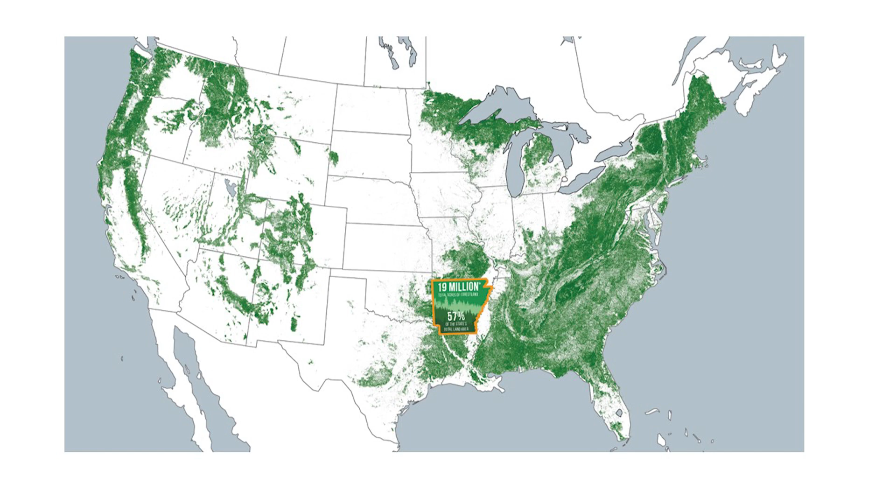This is about connecting the responsibilities and obligations of a public land-grant university, and in that, a School of Architecture and Design, to the interests of the state, its citizens, its natural resources. And it's best framed by this question: what does it mean to be a public university and a School of Architecture and Design in a state that is 60% forest? We're sitting here in the middle, I would argue, of the greatest natural resource in the United States.

Arkansas is 57% forests, 19 million acres. This is an agricultural state, to be sure, but the predominant dimension of that agriculture is its trees. And yet, for all of that, we are a state that is being overgrown. We are a state that is growing 2 trees for every tree that is capable of being harvested. And this is a surplus biomass of about 15 million tons per year.

Surplus is both challenge and opportunity, as economists would say, and the challenge for us is that it is an environmental challenge in terms of a density of forest that will lead to greater wildfires, greater insect infestation, greater difficulties with our groundwater. And at the same time, there is surplus opportunity in this if we can in fact devise new materials or new products for new markets, or even new uses for old products, such as dimension lumber.

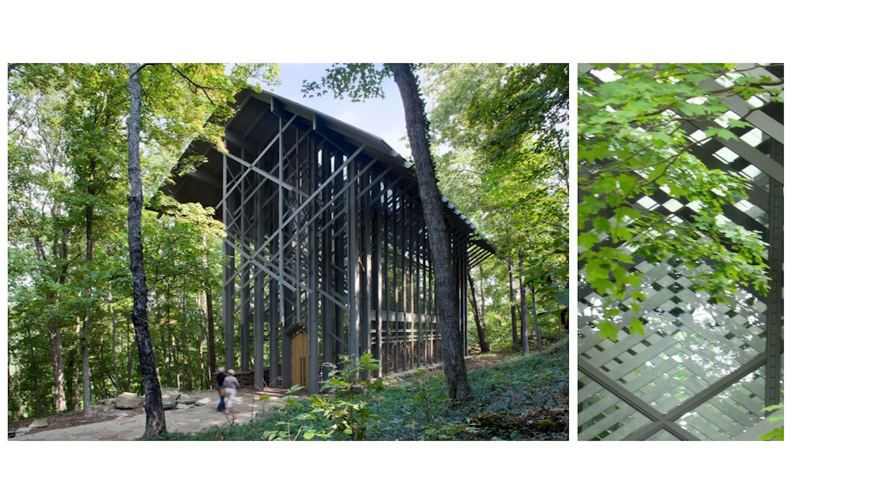engineering, and construction. And it's also so that our namesake Fay Jones demonstrated through multiple buildings the virtuosity of working with dimension lumber, seeing in that simple, banal material greater possibilities of elegance, of efficiency, and altogether beauty. And this then attaches to our work as a school to disrupt, I would say, for the greater futures of our students, for architecture, engineering, construction, for the citizens of the state, to disrupt community design, health and wellness design, housing design, timber and wood design, preservation design, resiliency design.

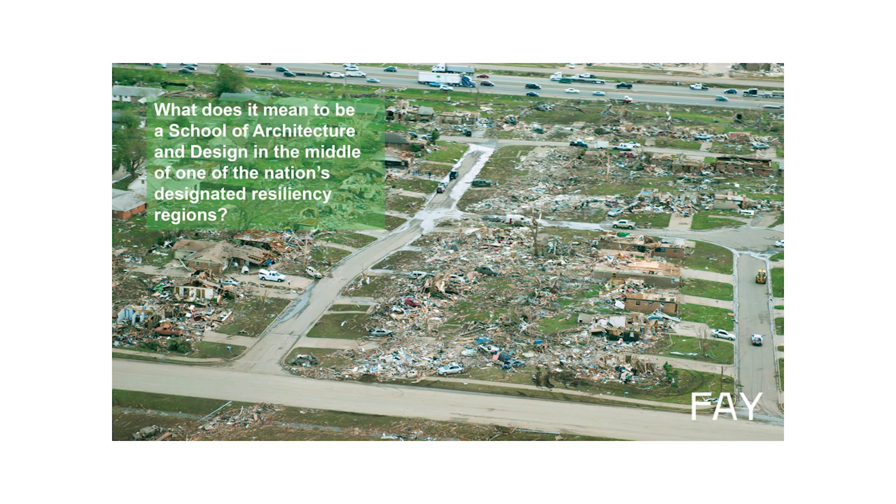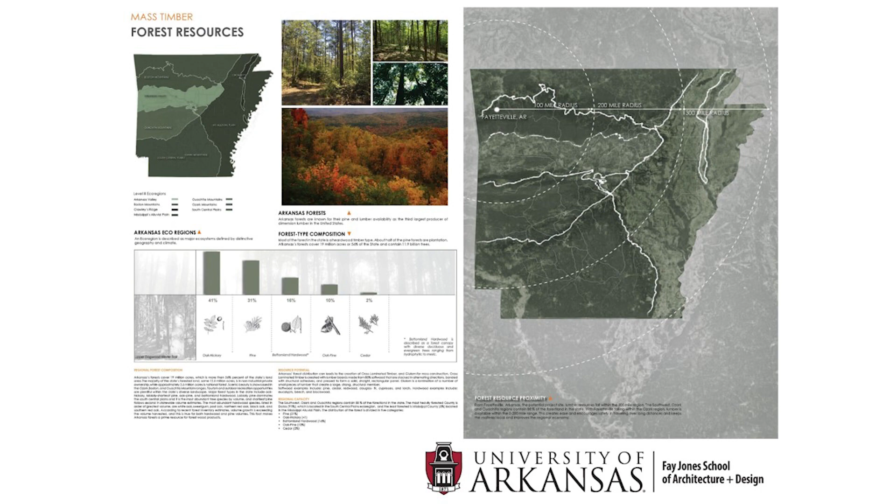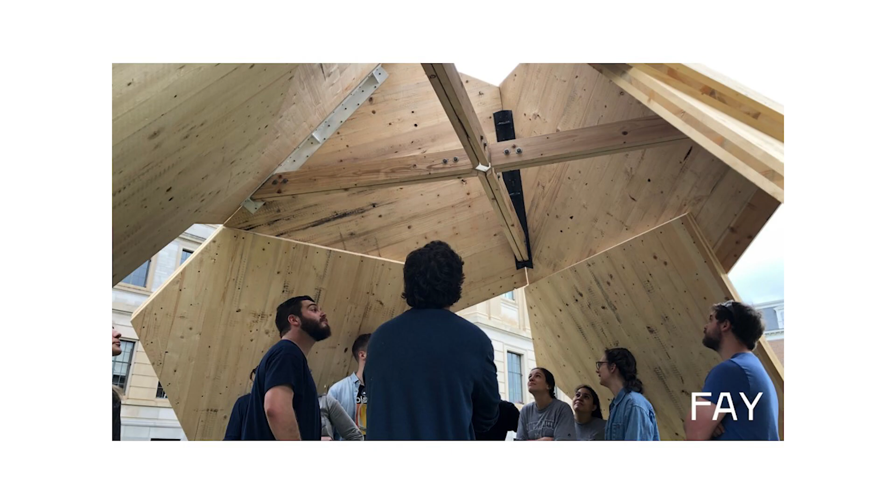And we've done this as a school in multiple ways over the last 8 years, researching with our students the character of the forests, measuring it in phenomenal terms, as well as in design build terms, as well as in structural terms, as well as in using a wood matrix composite and beginning to 3D print this at small scale in our studios.

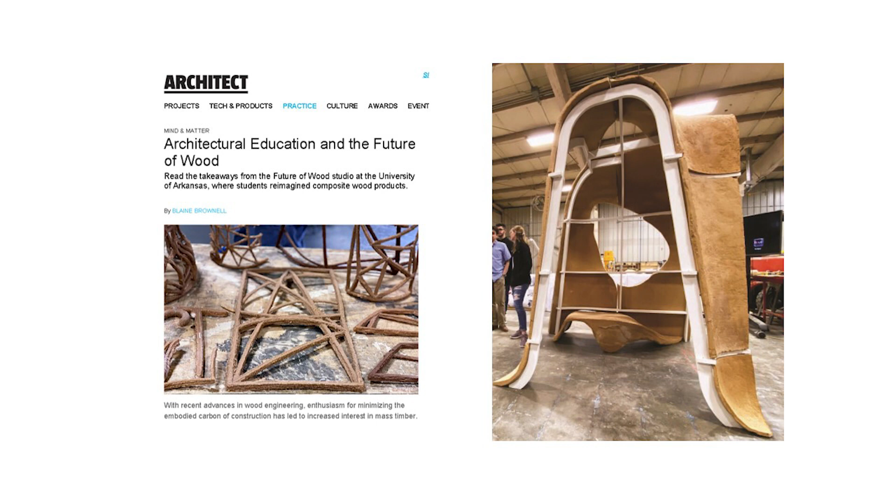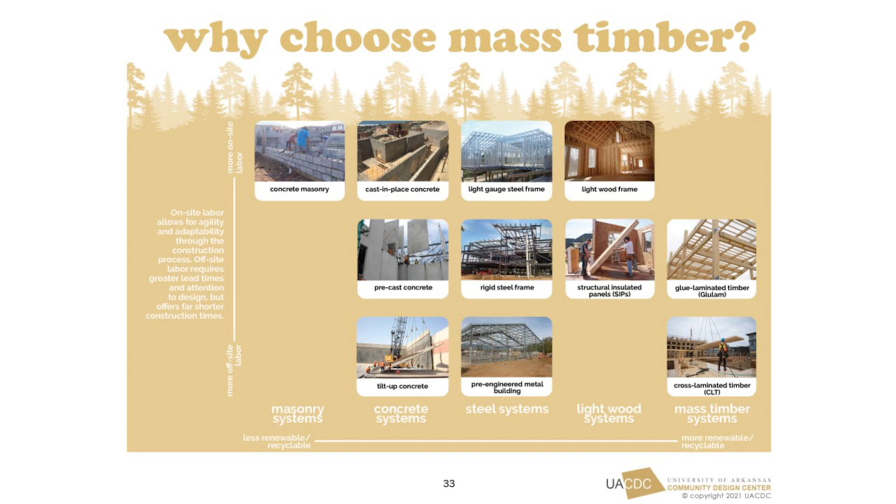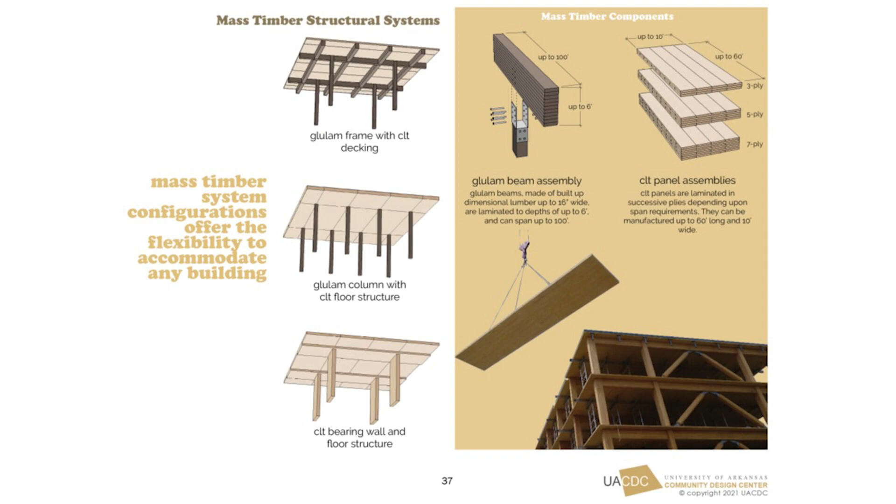Our Community Design Center has looked at an imaginary wood city, timberizing the 19 real estate building types of an American small town to understand how they could be optimized through mass timber construction, understanding the virtues of mass timber relative to every other form of construction, and educating our students, the future architects, engineers, and contractors, to this way of thinking. This is what brings us together today: how can we disrupt architecture, engineering, and construction in order to provide better alternatives to disrupt the housing market to our overall advantage?

We're doing this already in Pine Bluff in central Arkansas through reconceiving even stick-framed homes, examining how a simple stick-frame home could be looked at through CLT construction, 3D printed construction, and SIP panel construction, optimizing all those forms of construction, understanding what's engaged in overall budget analysis as well as life cycle analysis.

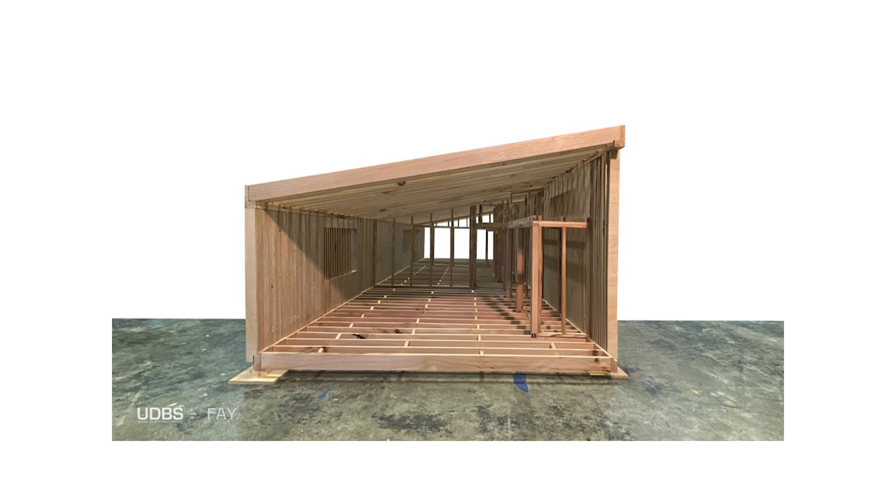And beginning to provide these types of houses at scale for ultimately a 600 house development in Pine Bluff. We're also looking at this at the affordable housing scale here in Fayetteville. We're beginning to work on affordable housing aimed at a design-to-income model, for people who make $16 to $18 an hour, and how they can afford such a home. We're beginning to prototype this.

But moreover, the university is investing $250 million in understanding how this type of construction, mass timber construction, can be utilized for a variety of academic building types that are transferable out into the larger world.

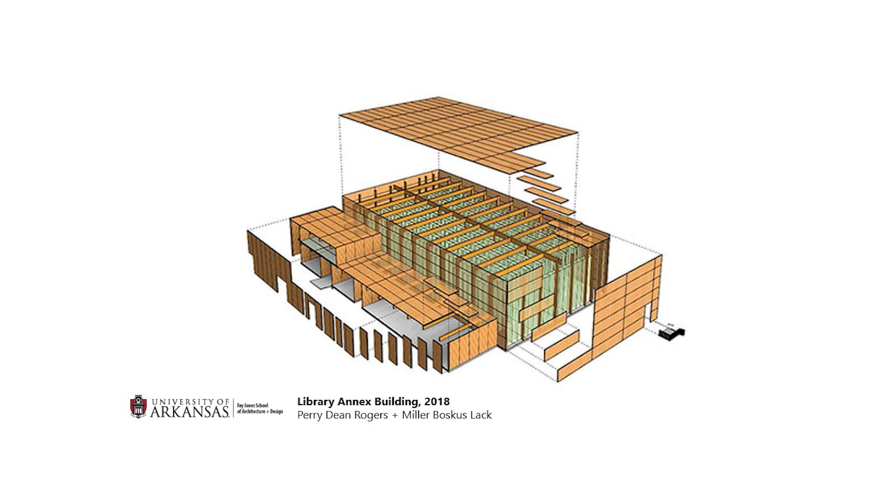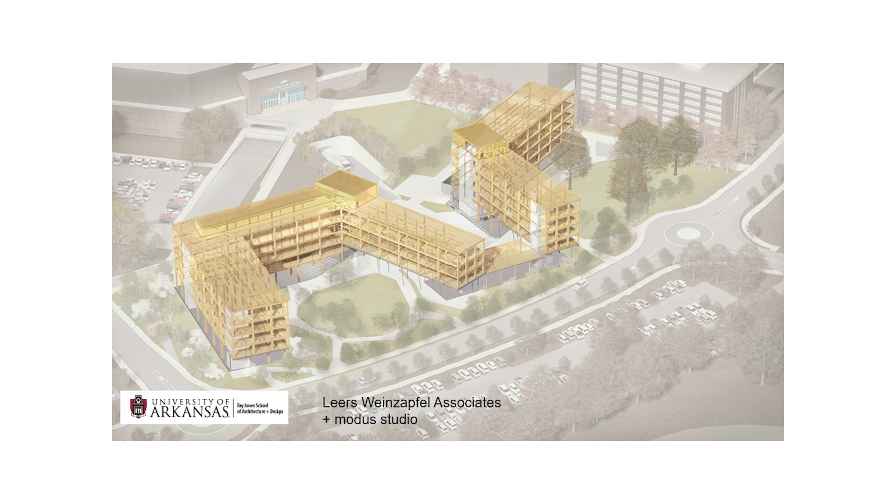The Library Annex building down on Martin Luther King Boulevard. The Adohi Residence Halls of 2019, 700 beds, 200,000 square feet, for its moment the largest mass timber housing complex in the country, optimized through mass timber glulam and CLT, providing a premium housing location for our students. There is a mass timber business case study on this for those in the development world who'd like to see how this applies to construction and development.

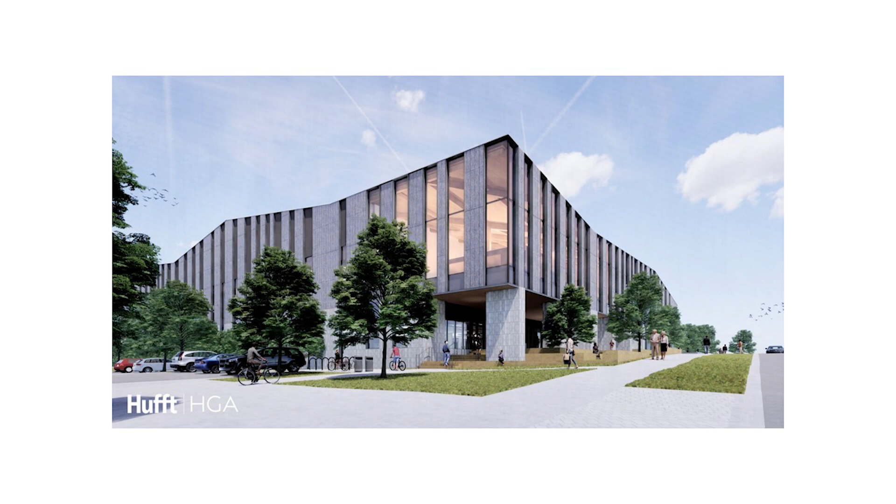And there is already another building underway, a research building, the I3R building on Dickson Street, which is again mass timber in its construction. So at our doorstep, all of us should understand that the university is prototyping this form of construction at a variety of scales.

We sit here in the middle of the country with over 23% of the US population living within 500 miles, 16 of the 50 largest cities. And we have our own housing crisis here in this region. We think we can address this. I propose we can address this.

And we should be manufacturing our own mass timber, which we now are in Conway, Arkansas, working with Mercer, a fantastic company that has taken over the former Structurlam plant in producing it.

You may know that Walmart has committed a significant amount of its new headquarters construction to be achieved in mass timber. This is available also on the Walmart website, and it too is coming forward, beginning to address the needs of a state that's 60% forest.

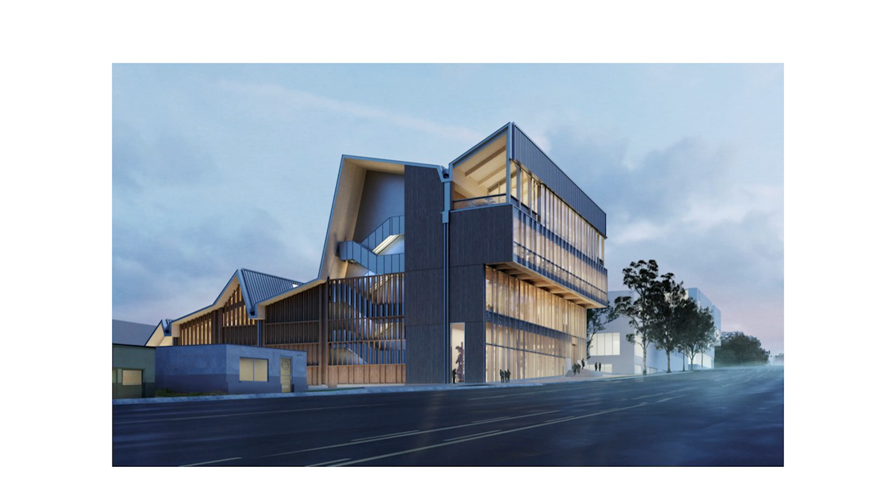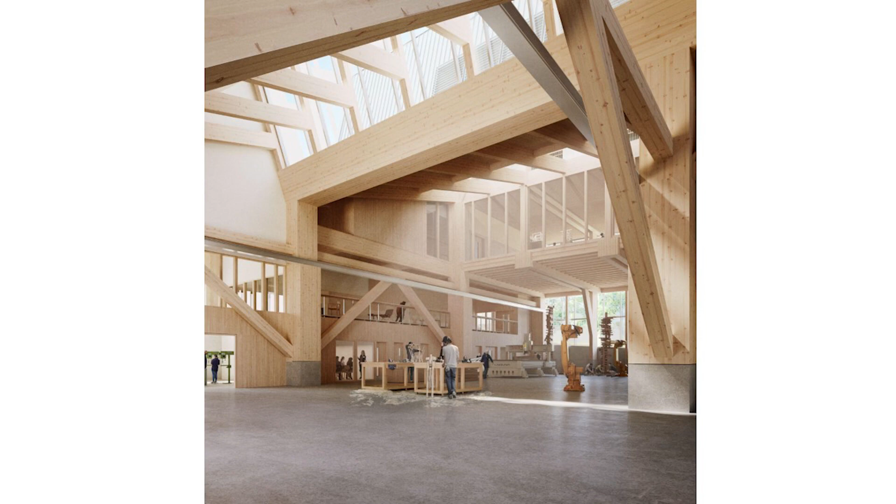And lastly, as Duke mentioned, we have proposed and are beginning to live the dream of a research and development center servicing the wood products industry of the state and the housing needs of the state, through the Anthony Timberland Center for Design, now under construction on Martin Luther King, which will look like this on the outside, making use of multiple species of Arkansas timber and wood products, which will have a fabrication workshop that will allow us to begin to prototype at scale what we call the Workforce 16 housing.

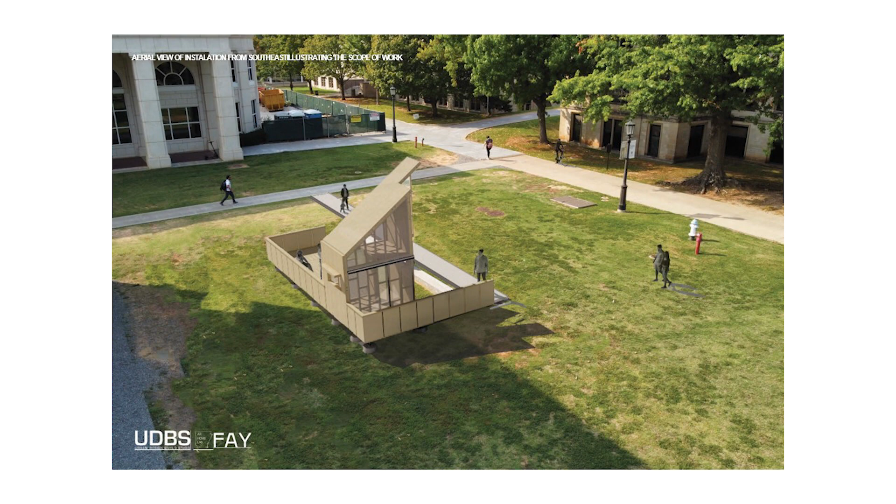And if you come to campus within the next several weeks, our students will be building a mock-up of that prototype in order to allow everyone to understand how we are disrupting architecture, engineering, and contracting through the work we're doing. This is the value ecology.

This is our answer to the question: what can we do to disrupt? What can we do to address the natural resources of the state? And what can we do as a land-grant university? Thanks very much.

So this is just a couple images of the first product, the first building that we've taken to market. This is a market rate multifamily building in Austin, Texas. We'll see a case study of that in a little bit. But really, we're focusing on things that make it a great place to live.

We really wanted to make sure that if we were going to design a system and try to proliferate this way of working across the country or even further, that we're actually doing something we feel proud of in the way that we bring it across. So really focusing on things that make it a higher quality place to live: lots of natural light, very efficient use of space, expression of material, and in this case, we are very focused on mass timber as a structural load-bearing system for our projects.

And then also we look very closely at the carbon story of our projects. Not only are we thinking about the operational carbon—our projects are trending about 45% better than the 2015 IECC, which is the kind of average code across the country—but really in an exceptional way, in a way that people are just kind of coming to the table with this, we're really focused on the embodied carbon analysis of the projects.

So instead of letting carbon emit into the air as concrete and steel buildings do, we're going to compete with tall buildings, and we want to replace that emission of carbon with a building that can hold on to that carbon with the use of mass timber, and then hold on to that for 50, 60, 75 years, as long as there's an active life of the building, and then hopefully then reuse those materials in the next life once that building has come out of its life.

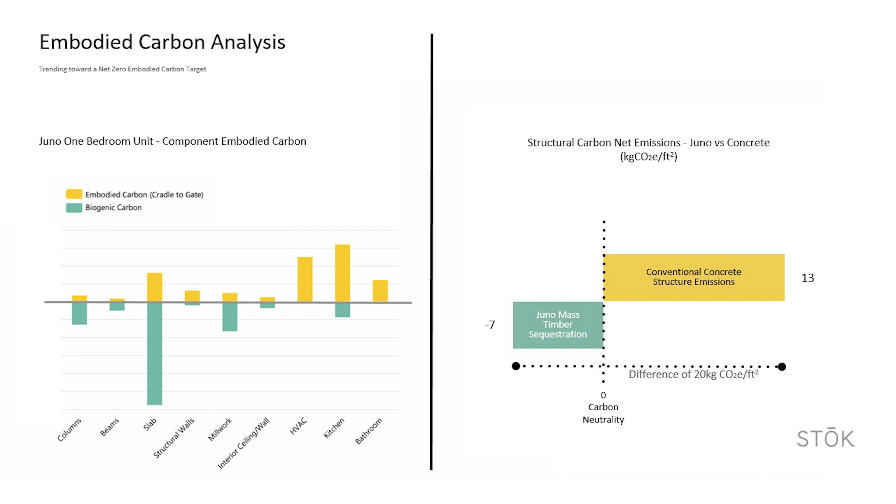But you can see here on the left that we're trending towards a neutral position relative to the embodied carbon on a project, on a per unit basis, because of the way that we're offsetting with the wood the footprint of things like washing machines and ovens that are necessarily going to emit carbon into the world.

So I'd like to share with you a project that we're just finishing right now in East Austin, Texas, a case study of our first project. This project is a little smaller than most of the projects we'll go forward with, but this is really a case study to get us out the gates, get us building a project very quickly, and making it real into the world.

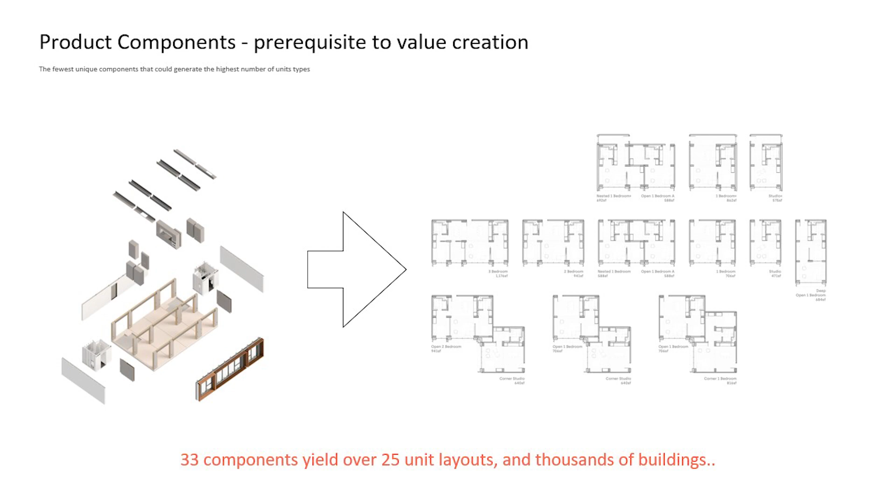So for us, we wanted to break down the design into a series of components, small, mostly flat-packed pieces that could then be reconfigured in many different combinations in order to create all the unit types that would be available or necessary for a certain market or location. By keeping that number of components very small, we can then design supply chains around that.

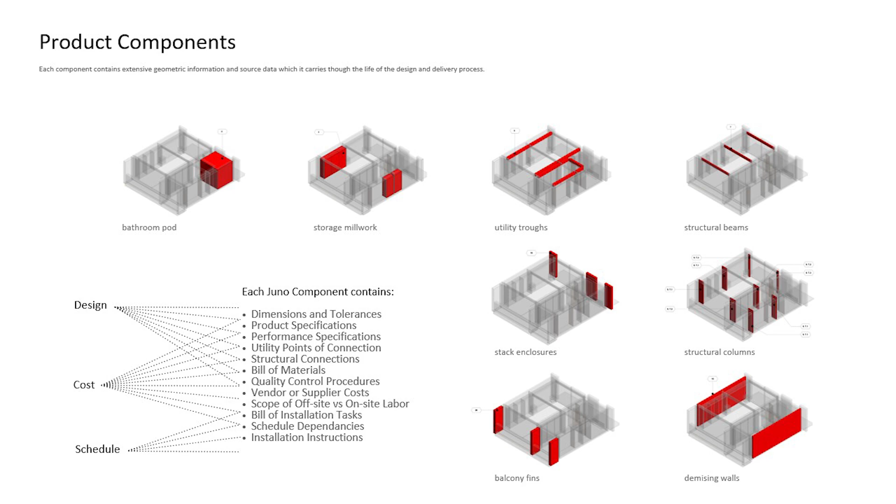So in the R&D that we do, we get to know those components really well, and we understand the design implications, the cost implications, the schedule implications of these components, right from the get-go, as products of their own. We understand how many connectors it takes, how many people it takes to install them, and what dimensional tolerances are required to put these things together.

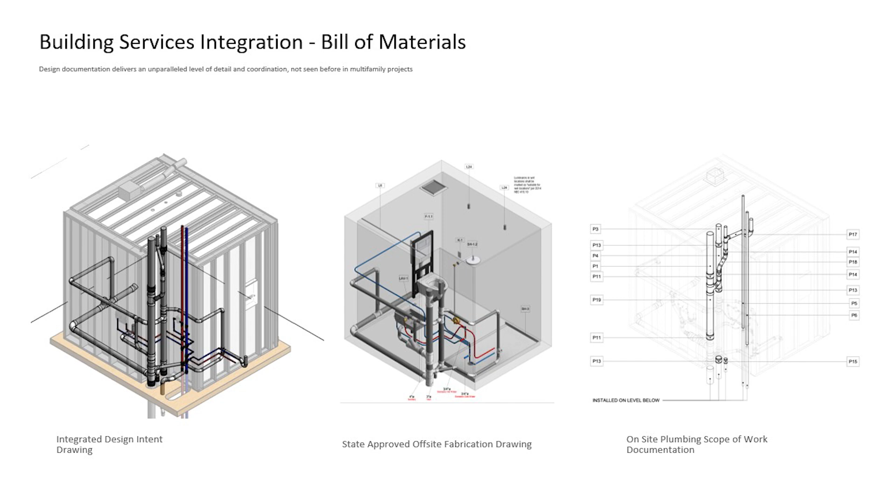And then we go into very deep detail to understand not only the design intent that you can see here on the left, but what a fabricator that might make something offsite would do. What would they do? What was in their scope of work? And then what is the resultant scope of work on the job site?

We want to be very clear that our job is to make these buildings go much faster than typical. And as a result, we have to be very clear with the people working on the job site that their scopes are going to be different. There's going to be less work, and we're going to be able to do it faster in a more systematic way.

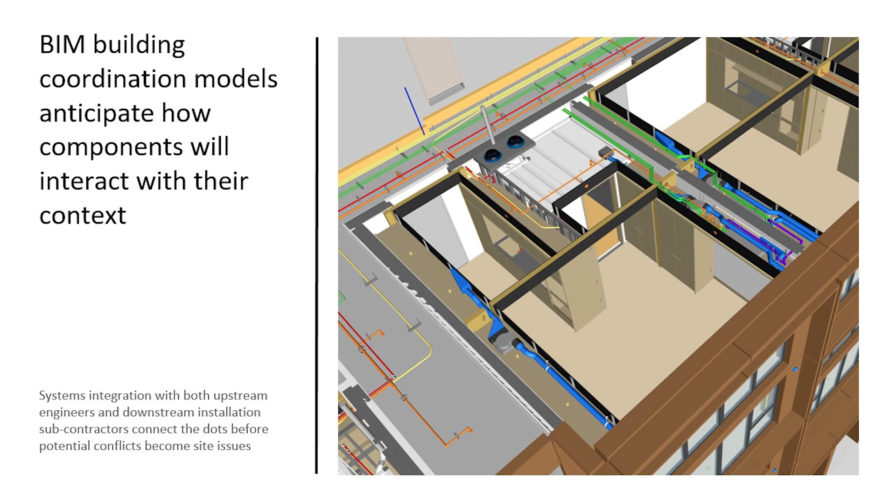Quite important and fundamental to all this is actually taking constructability coordination - not design coordination, but constructability coordination - into the design process, and not saving it for the general contractor to do while the project's under construction.

We want to make sure that these pieces, if they're coming to the job site, are not going to be changed or modified when they get there. We want to make sure there aren't large RFIs or waste on the floor in the dumpsters. We want to make sure these things are pre-coordinated so they come together and connect in a very clear way without mistakes.

So we take what is the common, conventional architectural design process that one would go through - everybody in the room, I'm sure, is very familiar with this. And because of the R&D, the components, and the tools and software we go through, we can actually screen away a number of tasks that typically happen on a project.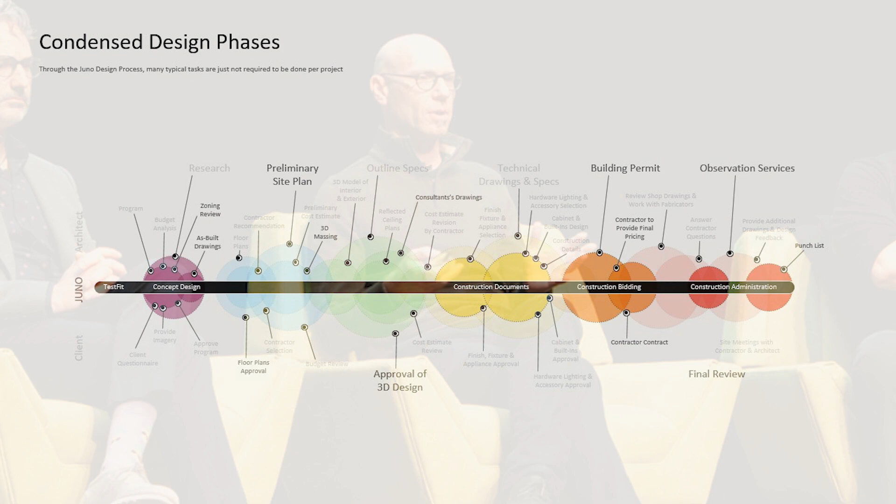As a result, the Juno design process ends up being condensed - fewer phases, less intense phases. This translates into an improvement in the design efficiency, in the design process.

The project in Austin I was just showing you, we actually finished the design about 60% faster than a conventional project of the same scale, and got through the building permitting process in just one meeting, because of the depth of information we knew about the pieces of the project and how they were going to go together.

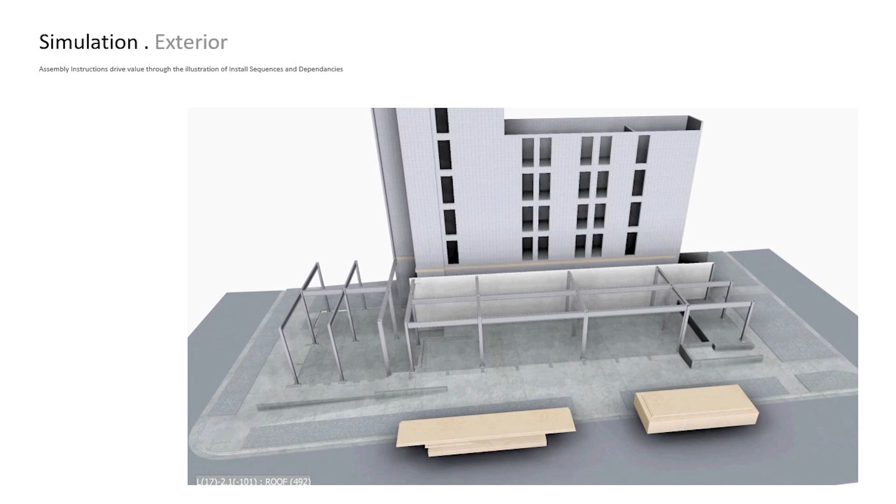We also use tools to plan out how the job will come together once it gets to the job site. Here's an animation that was really more of a planning tool than a presentation tool - a way of coordinating with the erector, the person driving the crane, to understand each individual piece that was going to come together on the job site, how they were going to be sequenced, what the safety procedures were going to be, and what the temporary measures were.

We went through everything, and this was really to get alignment with the installer, to make sure we understood how many people needed to be there, how long they needed to be there, what the schedule was going to be, and the durations. Because getting this critical path right, getting the critical path through the crane, is the key to making the job build faster.

So in the interest of time, I'm going to skip the rest of this video and just let you see that the building went together per plan. In 5 weeks, we actually had the full superstructure put up.

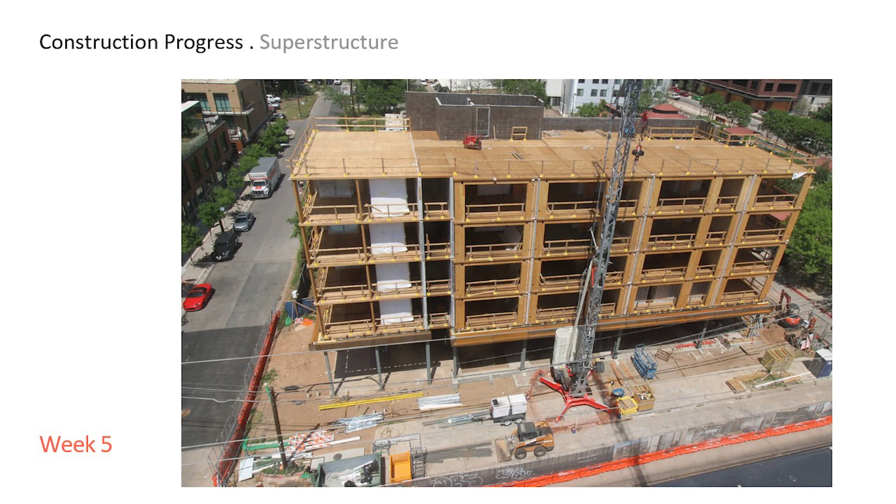And I'll point out, if you look down at the bottom left-hand corner, there's a very small dumpster, and it's empty. We had almost no job site waste as a result of this process, because we planned it out very precisely. We got alignment with the installer, and it actually went to plan. What was amazing is that only 5 people put that building together in that amount of time - 4 men and a woman.

And it was insane, the kind of efficiency of labor on the job site and the speed at which we were able to grow. In addition to that, this data collection is quite important to us. We used some technology that allowed us to track each and every piece as it was put together on the job site.

We were then able to tie this back to the BIM model and assign the parts the crane was lifting to the model, to understand which piece it was, how long it took, how many people it took to do that. And we were able to track that data and understand where we did better, where we could do better.

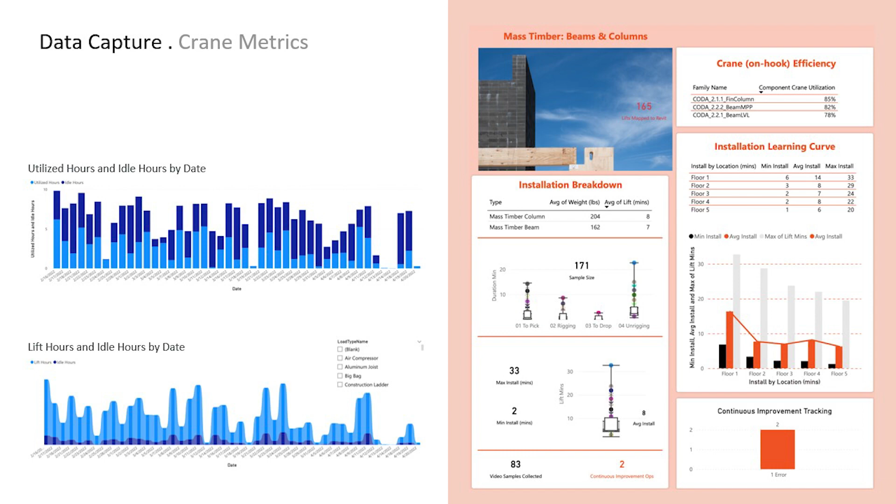If you look at the right-hand side of the slide, the installation learning curve, even in this small test case of a 24-unit building, every floor we went up we actually increased our productivity. So when we transition to 100 or 300-unit buildings, we expect to see even better utilization of the crane and of the labor.

That translates into economics that work better for developers. So the combination of the design process being compressed and the construction process being compressed allows us to deliver a much faster installation on the job site, in a way that we hope will take this system and propel it into the future.

For us, this particular set of components is really just the first test case of how this way of designing, this system of designing, could operate. So we can then design other products, so to speak—student housing, affordable housing, hospitality. Any projects that have the potential for pieces and parts that can relate and repeat can fall into this way of working and have these advantages.

So we think there's a lot of potential to push on housing, but we also think there's a lot of potential to push this way of working into other areas as well. Thank you. That's great.

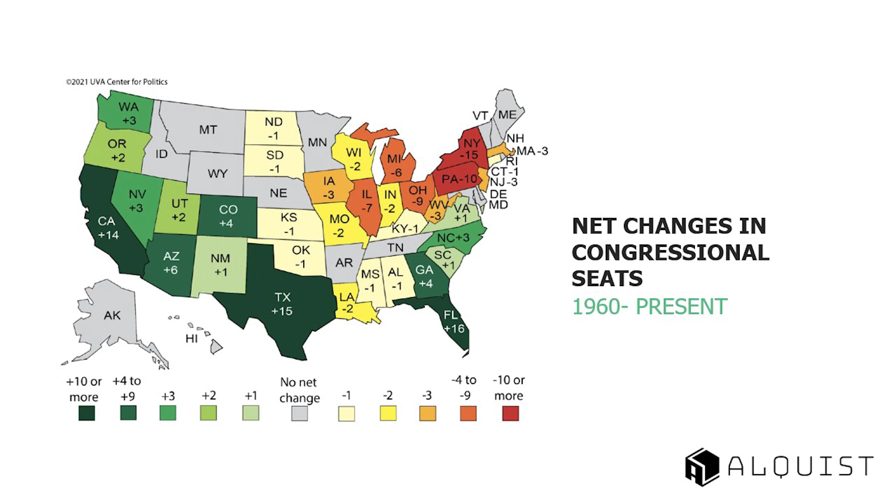These are the cities that were gaining population at the beginning of the century at identical levels per capita as a place like San Francisco saw 100 years ago. We used to say before COVID that we were in the rise of the third city. Little Rock is a third city - Des Moines, Iowa, Boise, Idaho, Albuquerque, New Mexico, Madison, Wisconsin, Raleigh, North Carolina, Birmingham, Alabama. Those are the cities that right before COVID were on the upward trend. We would sit there and look at the data and say around 2030 to 2035 would be the

golden time for smaller communities in rural areas, because those third cities would be oversaturated. But everything changed, of course, and if there's any silver lining to COVID, which is a weird thing to say, it's simply that it finally shone a light on how bad the housing problem is in areas outside of major cities. We weren't talking about that before. Remote work is one of the reasons why, but we're in this now unprecedented three-headed monster of migration.

We've always had financial migration. Now we have pandemic migration, and we have climate-based migration - not wanting to live around where there's natural disasters all the time. You add all this up, and we believe there's about 15 million Americans right now on the move looking for new places to live, work, and play. So when you look at smaller communities, there's major opportunity.

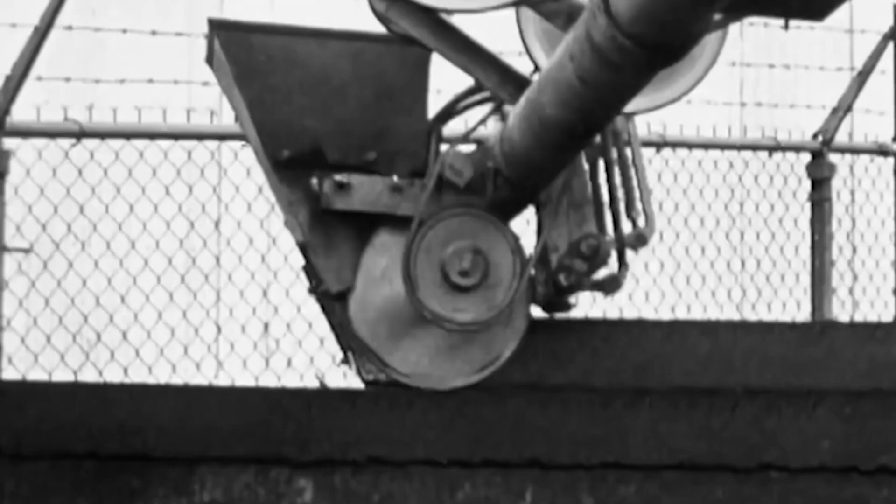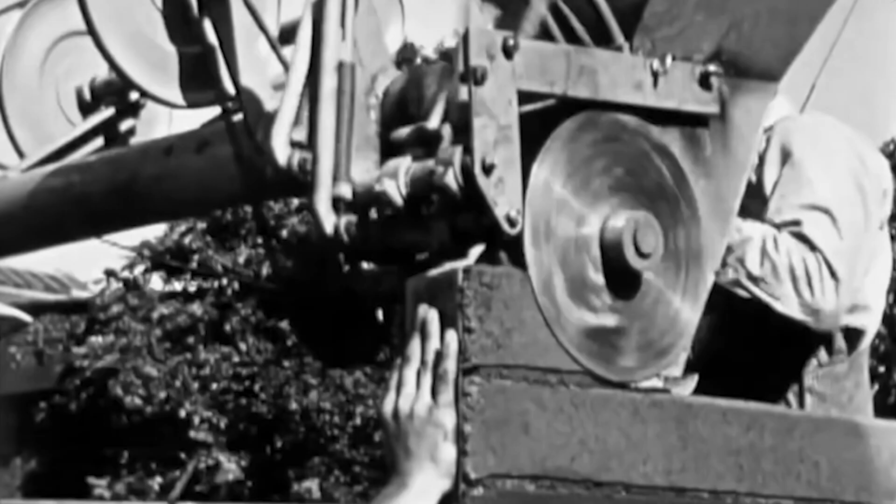So here's what's really interesting: 3D printing is not necessarily new. This is a video from 1934. This is basically how we 3D print with concrete today, except we don't stand on a scaffold and dump it directly into the hopper. We have a slightly more efficient system to do this work, but this is basically how we do it now.

Now, we at Alquist know that for us to be truly successful is when we finish a home that we can nail the choreography like these three guys do right here. Unbelievable. So, our first home that we ever printed was with Habitat for Humanity, as Duke said.

They're a fantastic partner of ours. We've worked with multiple chapters of Habitat around the country. Their mission is very identical to the work that we do at Alquist. This was in Williamsburg, Virginia. This became the first owner-occupied 3D home in the world. That was not the plan. We got lucky there. This is the home.

It is a 1,300 square foot, 3-bed, 2-bath, single-story, slab-on-grade home. We printed the exterior walls of the home in concrete only. The rest of the home was still built out the exact same way you would build any other home.

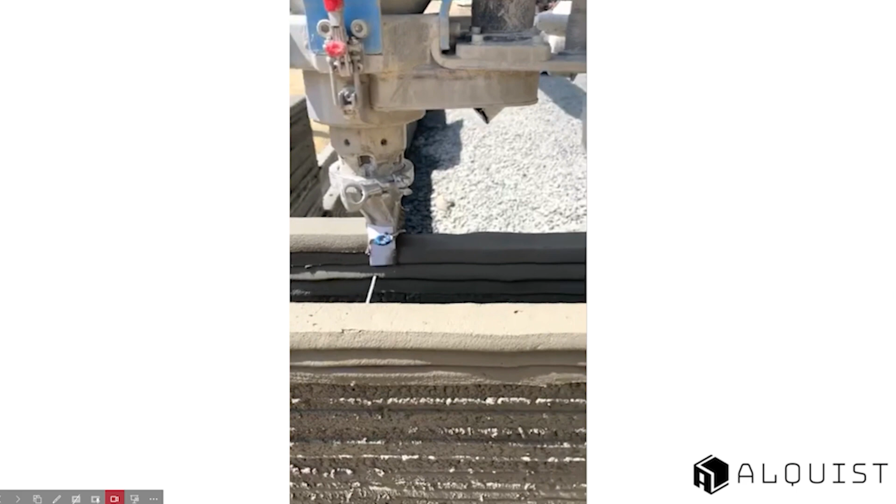The walls on the interior are all stick-built. That was the plan. The walls that you can see here, you would not know it's 3D printed when you go in there. The homeowner chose to cover it up with drywall. You don't have to do that, of course. But this home became that first home, and here's a short video of that home being printed.

What you're seeing here is the printing of the exterior wall system. We do two sides of the wall. Each side is 3 inches wide with a 6-inch gap. Inside that gap is where you run your electrical conduit. You can put your plumbing in there, but we put it on the outside. You put rebar or all thread to reinforce if you need it.

And then you go all the way up however many layers you're going. And we do spray foam insulation. You can use any insulation that you like directly into that wall cavity. And then you pour a bond beam at the top and you connect your roof to that. By doing this, we're achieving R values of 25 or more with this system.

We believe that housing is going to be made more affordable through 3D printing. This is April and her son Xavion. They're the homeowners of our first home that you just saw there in Williamsburg. So here's a couple of facts and figures about 3D printing. If you've seen videos of this online, you've probably seen what I saw back in 2016: you can print a house in a day and it only costs $10,000.

That is not true. There's a lot of misinformation about this industry out there, and one of our missions is to help fix that. But your capital savings come in 3 places. First of all, time. Much like what you were just talking about, we can reduce the overall time by about 2 to 4 weeks versus a normal stick-built process.

Labor, we need only 2 experienced humans on the job site to make this work. With an inexperienced crew, we need 5 or 6. And then your material cost typically is lower than your wood-based systems. Now today, we're not seeing massive savings just yet. We're about on par with what it would cost to build a home in any other way. But we know that in the next 24 months, those costs are going to continue to drop.

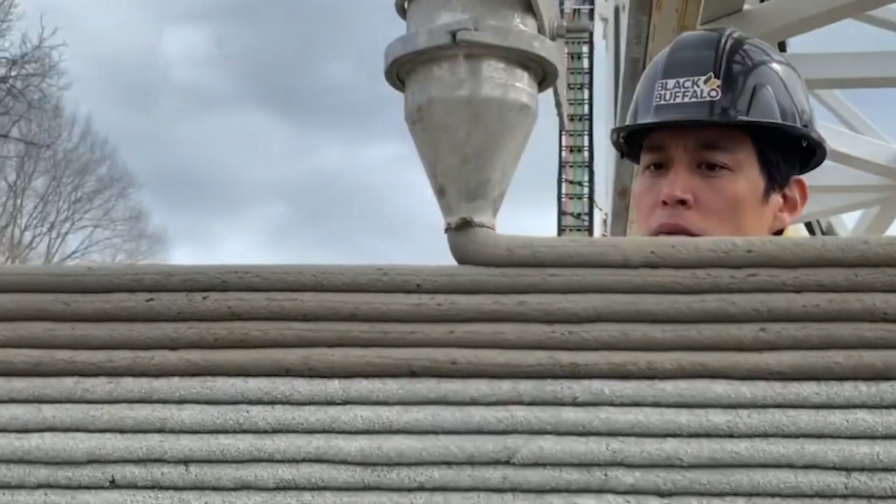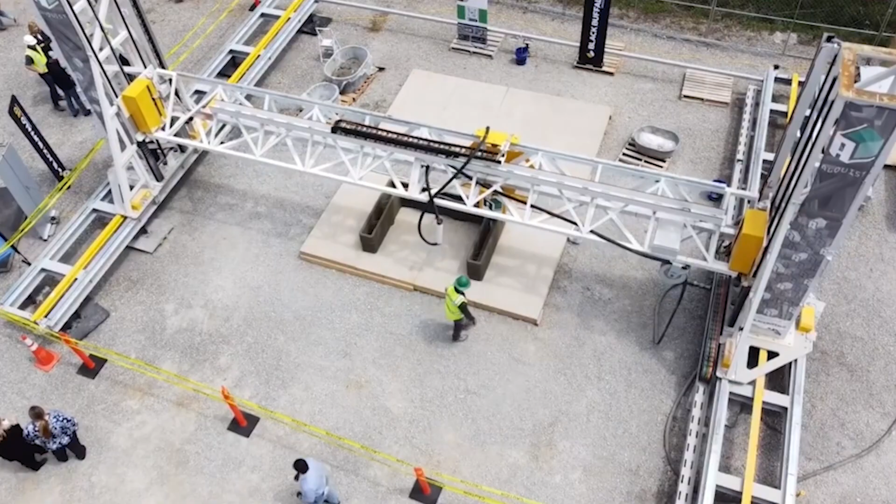Now, we do have to change the way that we're running the industry. You can see here in a moment, this was the printer that we used for the first couple houses, these big giant gantry-style printers. They're enormous, and they're great, but they're kind of overkill for a single-family home. So this printer requires 4 tractor trailers to move it around. It also costs over $1 million to buy, and it takes about a week to 10 days to set up and calibrate. That's not going to work.

So these are the changes to the industry that have to happen. First of all, the robots themselves. They have to get smaller, more nimble, less expensive, easier to maneuver. I'll show you in a moment the robot that we're working with to do that.

We need more experience. How many of you have experience 3D printing a house? Right, you do? Okay, you're hired. We'll talk afterwards. But we can't find people doing it because most people don't do that work just yet. And I'll tell you about how we're going to answer that in a moment.

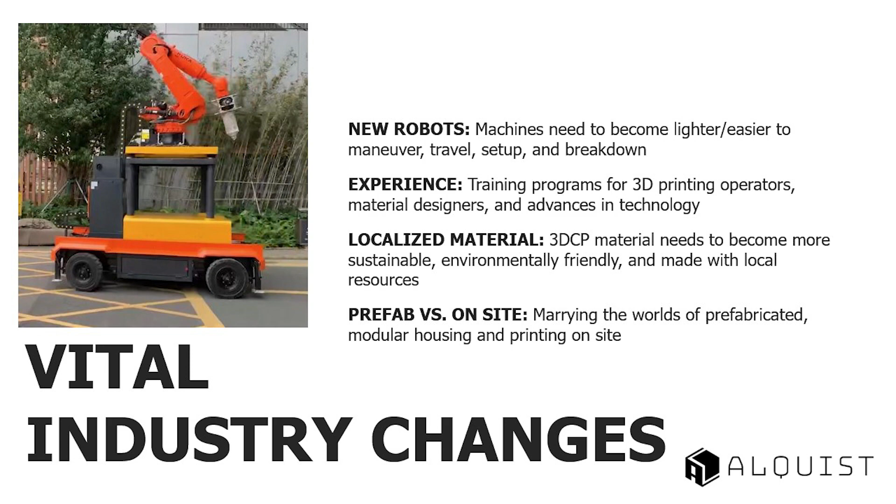And then the material has to become localized. Our goal with our material is to get to the point, I'm a child of the 80s, so if you've seen Back to the Future, the first one, the final scene when Doc pulls up into the driveway and he's pulling stuff out of the trash can and throwing it into the flux capacitor, that's what we want to do to print the homes. Probably not out of Miller Lite cans, but maybe, but most likely out of the material that's available locally where you are. That's where we're heading.

So right now, our company, we were based in Iowa. We're in the process of moving our headquarters to Greeley, Colorado. We just worked with the state and the city of Greeley on a major incentive package to put us there. And we're partnering with Aims Community College on a training program I'll talk about here in just a moment.

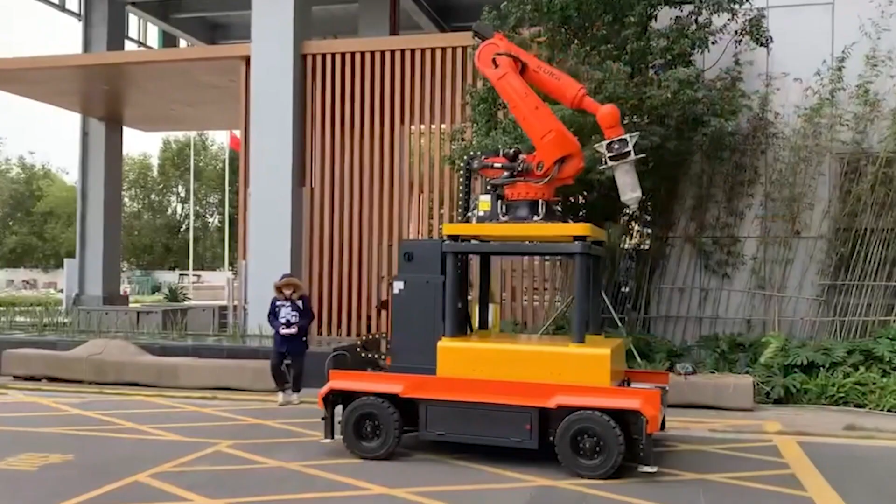The printers need to be new. This is our new printer in partnership with RIC Technology out of California. We are making this printer together. This printer is way more mobile. You can drive it around just like this. It can go about 20 miles an hour. It has a 9.5 foot span reach, and you can print a 1,200 square foot home without having to move the printer.

If you're going to do a bigger home, which we are doing, you do different movements of that printer. We're also working on an extension to that arm. This printer costs $350,000. You can put it on a flatbed trailer and pull it with a pickup truck, and it takes about 2 hours to set up. This is the more efficient way to do this work.

In terms of the looks of the homes, we're playing with different designs all the time. Those are different swaps of a nozzle head on the actual machine, so we can smooth the concrete to make it look like stucco. We can do some fun designs. We can print your name on your house if that's what you want to do. Lots of different ideas for how to do it.

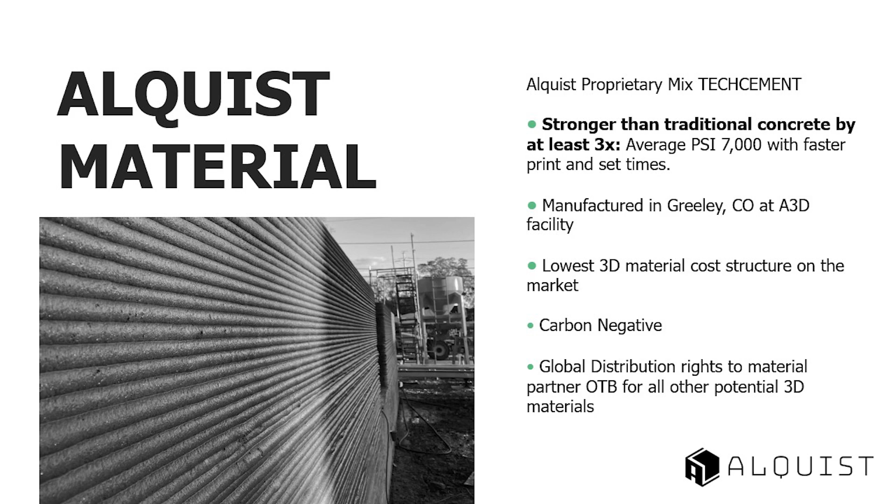The material is key, though. It's much like a desktop printer. It doesn't matter if you're using an Epson printer or an HP printer. They all basically do the same thing. Those robots are going to become ubiquitous over time. The material, however, has to be localized.

So right now, we have a non-cementitious material, where part of it is recycled glass, recycled plastic. We're playing with hemp. We have graphene. We have lots of coal ash that's inside this mix. We're constantly playing with it. But the mix that we're going to print with here in Arkansas is going to be different than the mix that we're printing with in Colorado or Florida or any other part of the world. It has to be localized.

And we believe we can use a lot of wood in this system and combine these worlds, which is where we're headed right now. We're not just printing homes, we're printing infrastructure. We're printing curbs in Greeley, Colorado. Curbs are not the sexiest of things, but these are very sexy. They have drainage throughout the curb system so that you can eliminate the need for metal sewer grates, which eliminates where water and debris pool on your street systems, which causes damage and costs communities millions of dollars. We can change all that by printing curbs.

We're printing retaining walls, underground culvert systems, elevator shafts. My wife gets tired of us driving around and me pointing out the window. We can print that, we can print that, we can print that, because we can. That's where we're headed. So I want to take a moment and explain why we're called Alquist.

My background is in theater, so of course it makes total sense that I now run a construction company. But Alquist is the name of a character from a 1920 Czechoslovakian play that no one's ever heard of called RUR. This is the piece of literature that coined the term robot. The plot of the show is man invents robots to speed up his manufacturing facility. The robots don't like how they're being treated. They rise up and they kill all the humans.

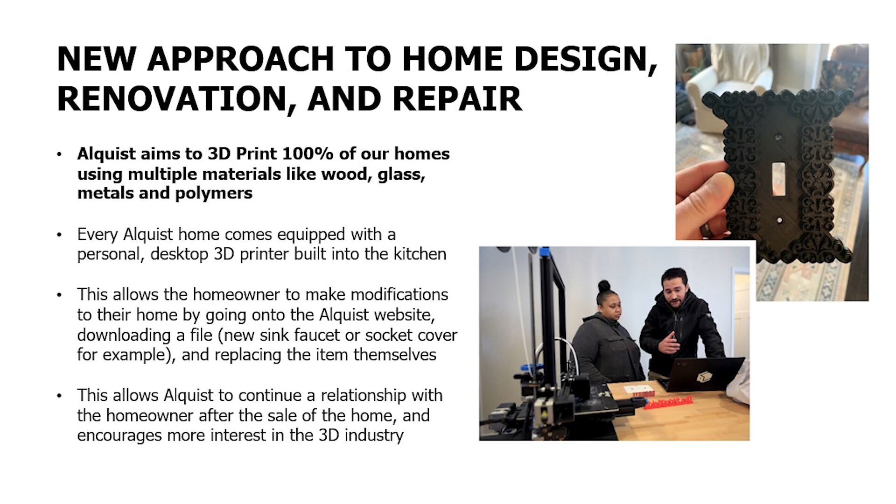These are my kids. So also, every Alquist home comes with a 3D printer, a personal desktop printer built into your kitchen, just like a microwave. We're doing this to help stand up the industry. In the near future, if something breaks in your home or you want to change the look or design of something, you're not going to go to the hardware store anymore. You're going to go online, download a file, and print it out yourself.

Right now, we're printing doorknobs, drawer pulls, sink faucets, electrical covers, little things. We give every homeowner a jump drive with a dozen different designs that they can do, and then they can create their own. This is where we're heading. We're not just printing in concrete. We're printing with wood. We're printing with glass. We're printing with plastic. We're printing with chocolate. And yes, it is delicious.

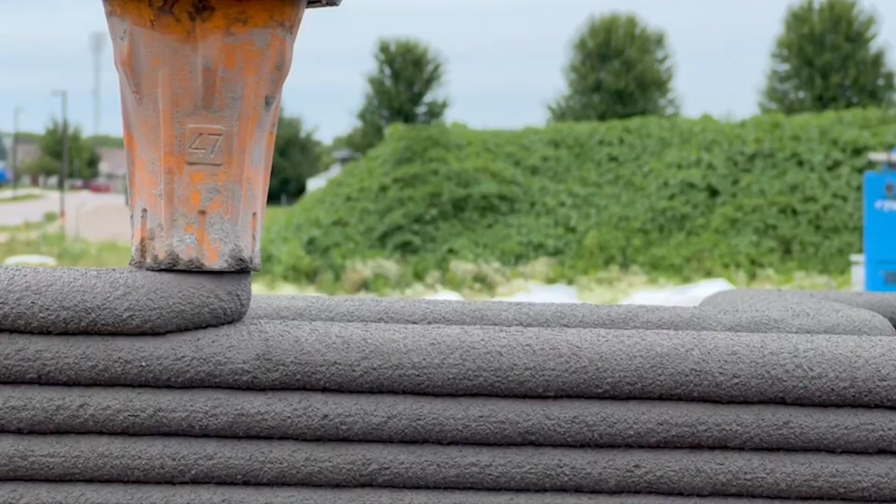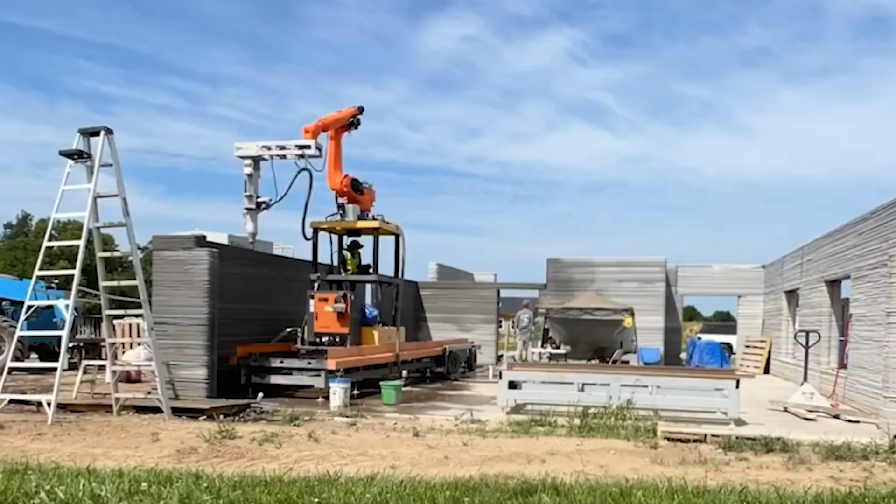This is some footage of our current prints right now in Muscatine, Iowa. This is using that RIC printer, our new printer that I just showed you. This is the work that we're doing today, and it's going to continue to evolve. We need to be moving faster. We need to have a little bit less labor on the site. We need to have the materials drop in cost when we can actually localize the material. All those pieces of the puzzle.

We need to be working with brilliant guys like this to help figure out how we put all this together. And the only way to do that is through partnerships, which is why we're really excited that we're going to be here in Rogers next year printing one of the first homes. So there's 15 million Americans on the move. They need to find new places to live, work, and play. That means they need new homes.

It will shift the main thrust of economic development from paying incentives to big employers to investing in building up a community's quality of life. As communities attract more remote workers, their tax bases will grow, allowing them to improve schools and public services, benefiting everyone. Eventually, companies will come too. That holds out the possibility of a better, virtuous circle of economic development." I could not agree more. This is what drives us every day. And thank you so much for your time this afternoon.

There's one over here. While you make your way there, I'll make reference to the slide you're all looking at. Zach made reference to this in his remarks - this is a demonstration project that Groundwork has partnered with Alquist on. Marlon Blackwell and his team have taken design responsibility for this, and this is conceptual. It has not been to the city or through the city yet, but we thought we'd give you all a preview. It was announced several months ago that we were working on this.

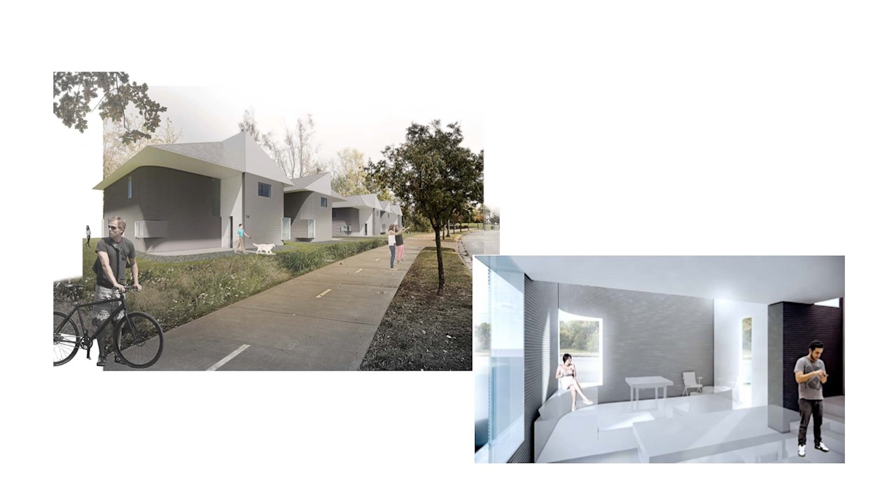Zach, there's a few more. As you see, I think these can fit into the fabric of the community quite nicely.

These will be 2-story side-by-side duplexes. Zach, correct me if I'm wrong, but this will be one of the first 2-story printed homes. It'll be the second one in America. The first one's in Houston. There's only 5 of these in the world that have gone up above 1 story. This will be the first duplex that's ever created.

This concept came out of an idea that my colleague Joe Crimmings had for a Usonian home, taking Frank Lloyd Wright's concept where he got a letter 100 years ago from somebody saying, hey, I want an affordable home, but I also want it to be beautiful and high quality. Can you build that? Can you design that? And that's what he did. The material he chose was concrete. So that idea of a Usonian home, of workforce housing, just because it's quote unquote affordable doesn't mean it can't be beautiful and high quality. And that's the exercise that we're trying to do.

And with Marlon's team and going through the design, we've come up with some pretty amazing ideas. Oop, I went too far.